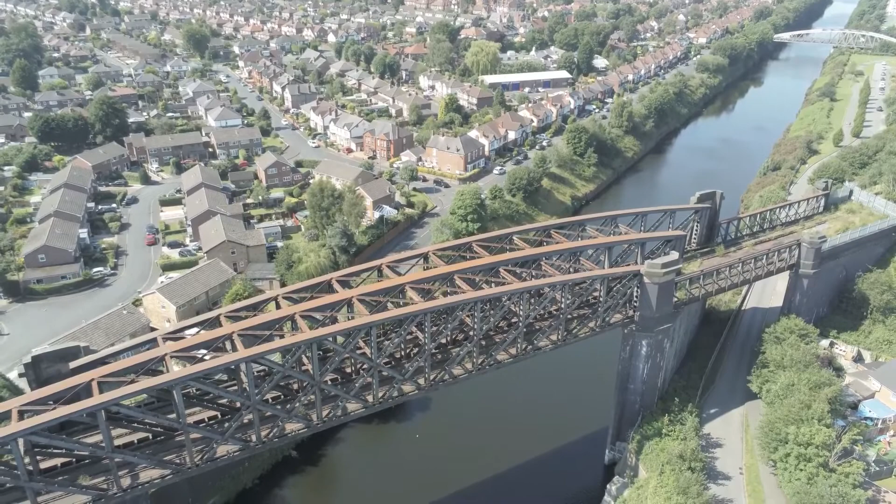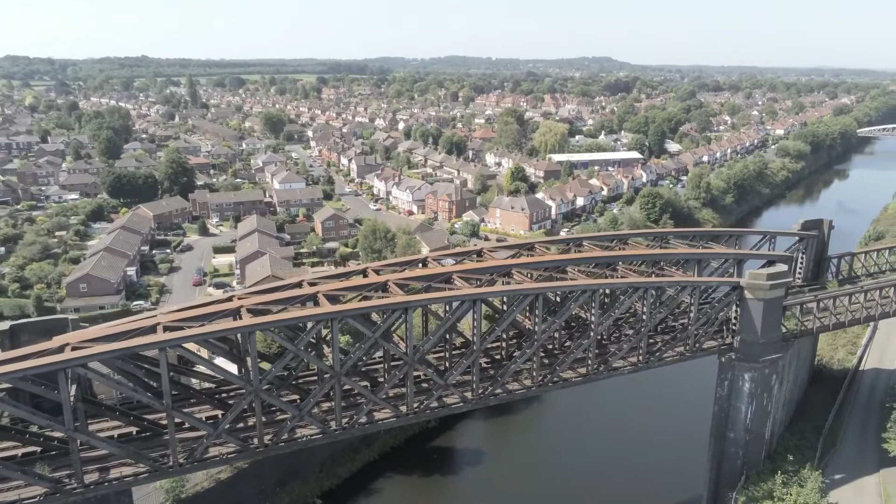Hello guys, welcome back. This is our second class of our course where we are designing a bridge, a prestressed bridge made of steel, concrete, and tendons that all compose the idea of prestressing.

In this class, I'm going to resume the first class where we saw how we are going to design our bridge, and we knew how the bridge was conceived. It's made of a 3-span bridge, 4 girders, a deck, a haunch, and a girder. The girder is made of a cross section of a BT-72 high. Our deck has a thickness ts of 8 inches. Our haunch is made of 1 inch thickness, and well, let's begin our class.

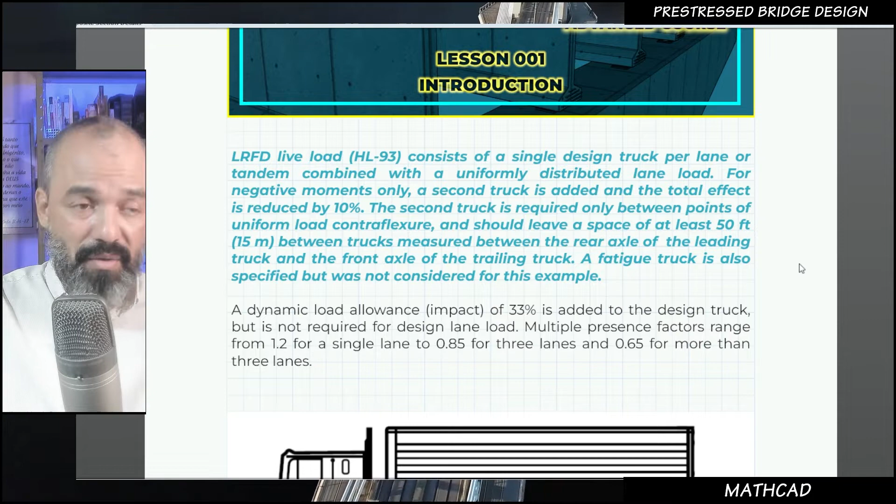So as I said, guys, you are going to take a PDF document where you can follow the instructions that I'm going to discuss in the classes. And we saw that we have to use a load truck in our designs, and this is very important in order to get the loads and the resistance that we are going to take out from the bridge. This idea of a dynamic load allowance impact of 33% we are going to discuss later in this class and in the course.

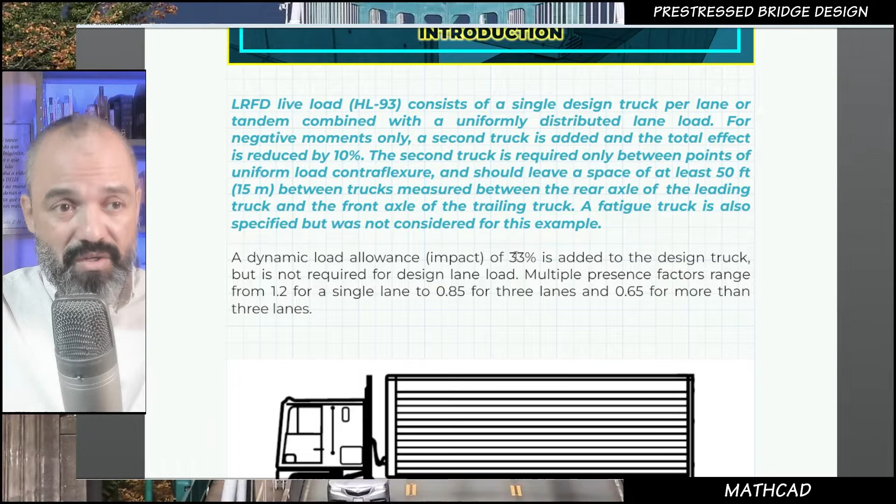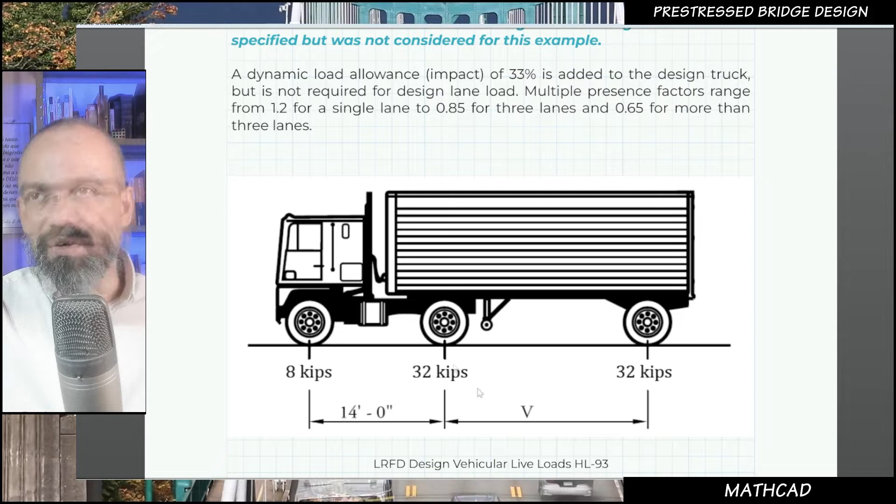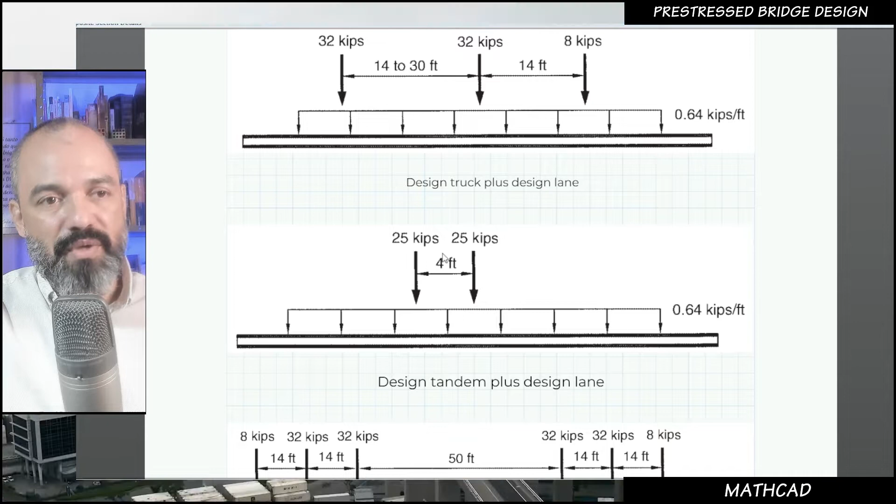This is our load truck, the design truck that we are going to use, made of 3 axles with 8 kips and 32 kips. We are going to use both distances here of 14. When we put the load of the truck on the bridge, this is the main idea of how we are going to use the loads, the lane load and the truck load, right? If we had chosen to use the tandem approach, these would be the loads that we had to use, but it's not the case here. This is the design we are going to see specifically in the 5th class.

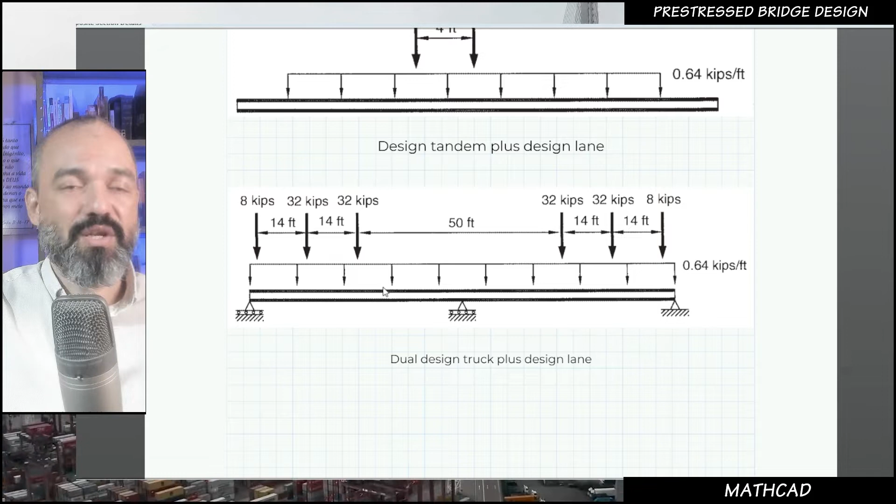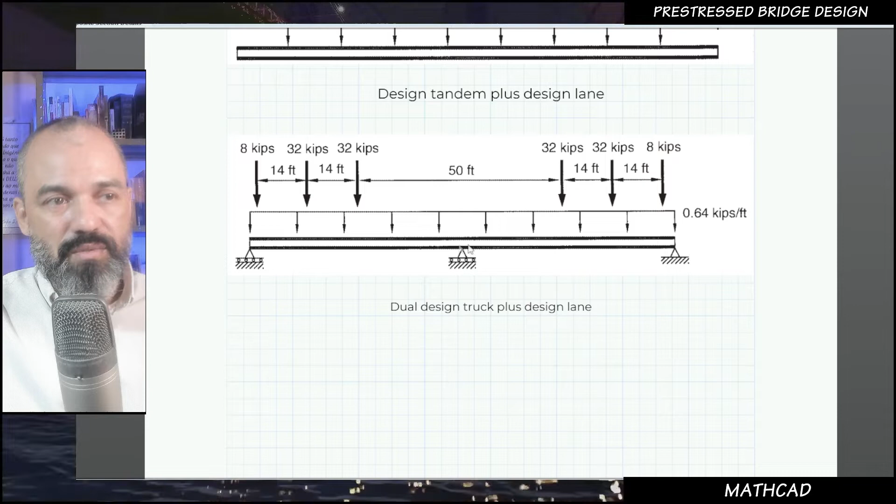We are going to discuss when we have a multi-span bridge, a continuous bridge, even though we are using a methodology made of girders that don't allow us to have a bending moment on the piers. What we have to do here is just to put a roller here, so we won't have negative moment on the piers, on the supports.

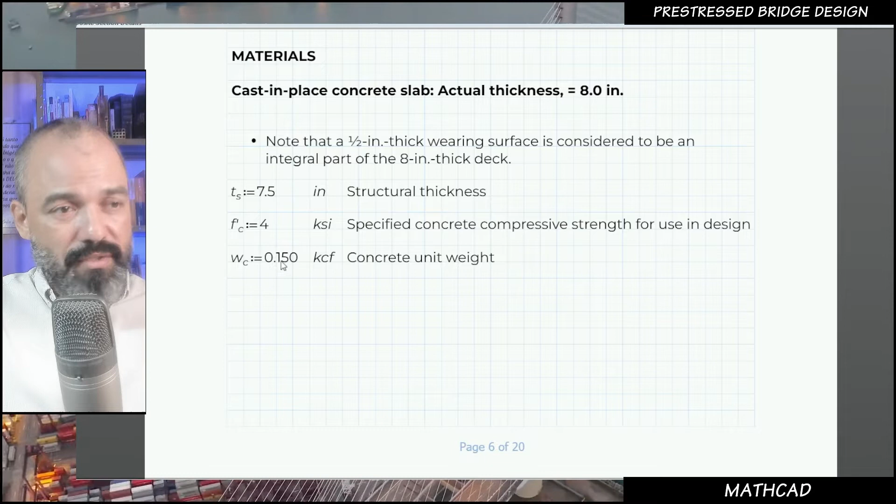This is our declaration of our variables, the ts of our deck. When designing the deck, we are going to use 7.5 inches, but when we are taking the self weight of the deck, we are going to use 8 inches. Our f'c is 4 ksi for the compressive strength of our concrete for the deck. Our concrete unit weight is 0.15 kcf. These are the declarations for our precast concrete beams.

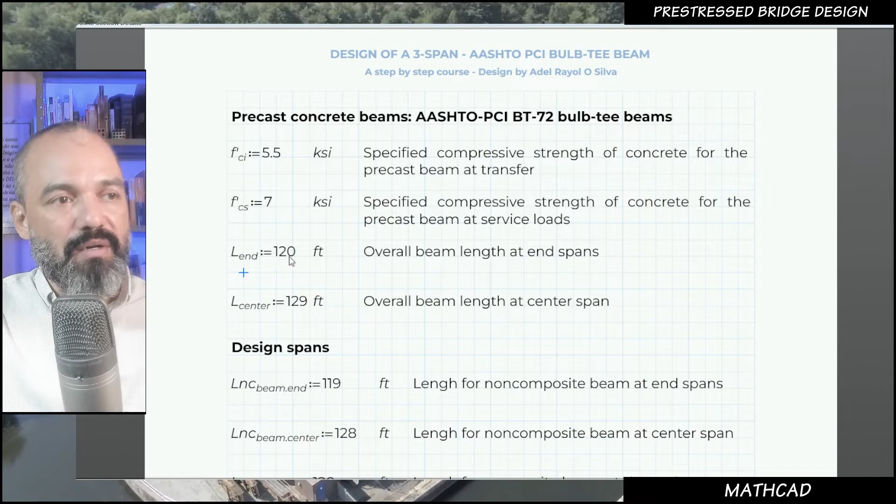It's made of an f'ci because it's initial, at the transfer, so that's why I call it i. We are going to use a different specified concrete strength for the deck and another for the girder, because we are thinking about economy when we are building the whole structure. And for our concrete at service loads, we are going to use our f'cs of 7 ksi. The length of our bridge is 120 here in our sketch of the bridge: 3 spans, span number 1, span number 2, span number 3.

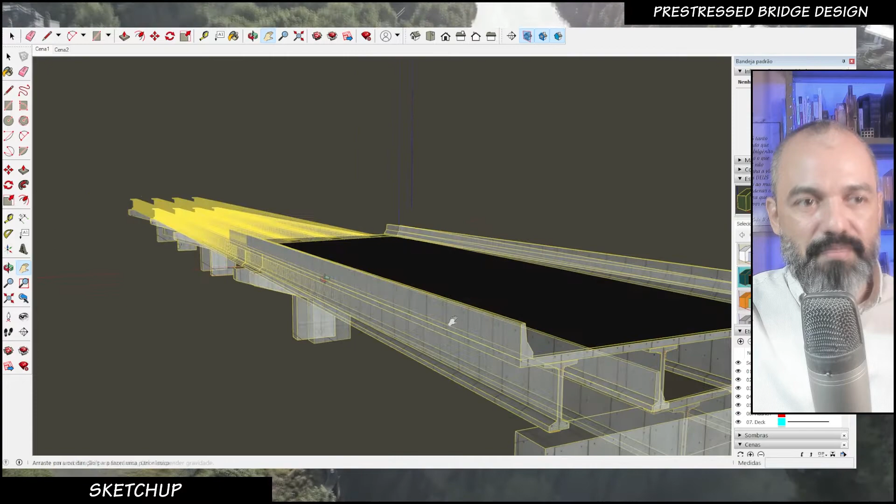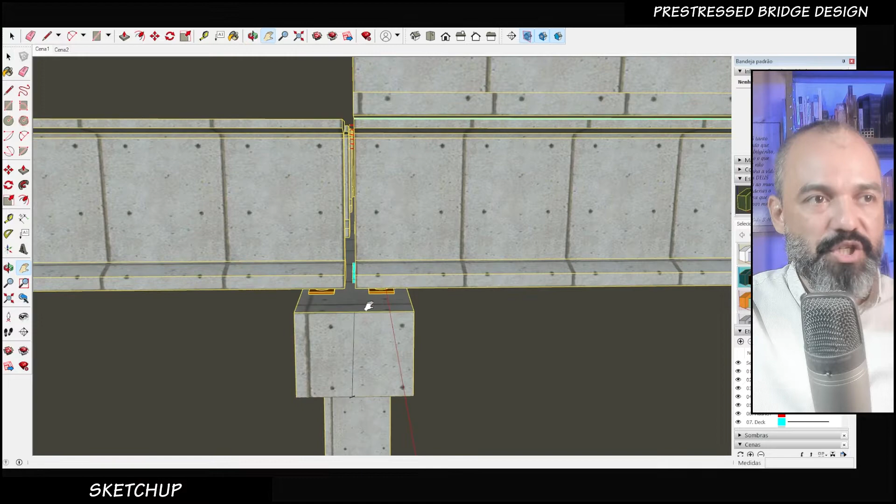I put here just a deck with a wearing surface and a barrier, in order to show you guys how the bridge is going to be at the end of the day, when we finish building it. So these are the tendons or the prestressing bars: harped tendons and the linear tendons down here, and the bearings. Thinking about a simply supported bridge, this is why we won't have negative moments here, because I have a separation between elements, right? So we won't have negative moments over the piers. So this is our bridge.

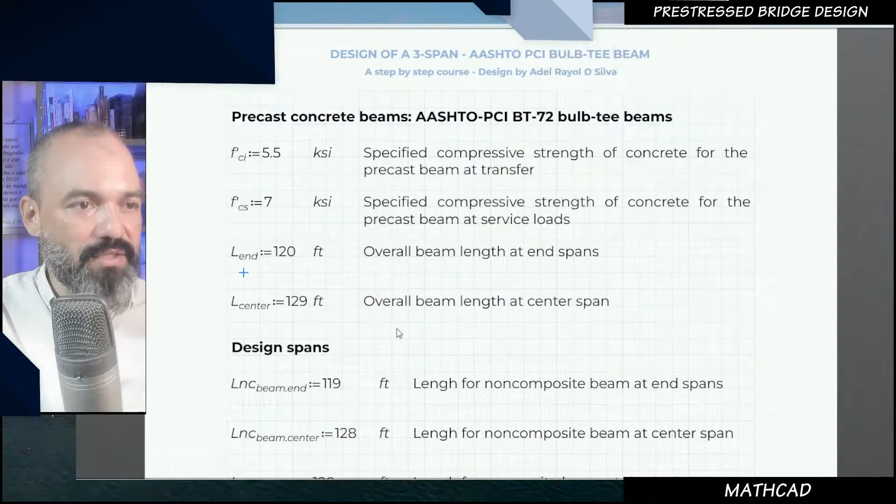So let's continue here. You can follow by the use of the PDF paper, or you can take this exercise into the MathCAD software.

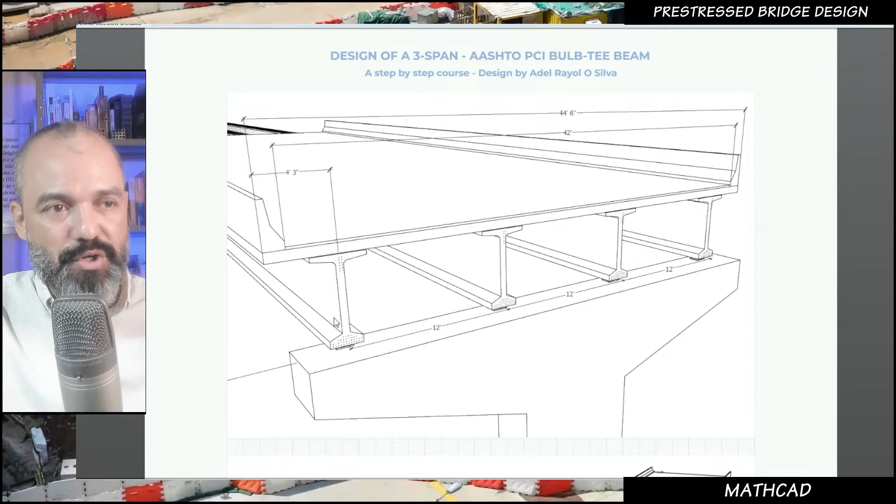So you are going to have the possibility of changing the variables, the numbers. So you are going to study any other bridge, span, number of girders, whatever. All right, you are free. Use this material as you will.

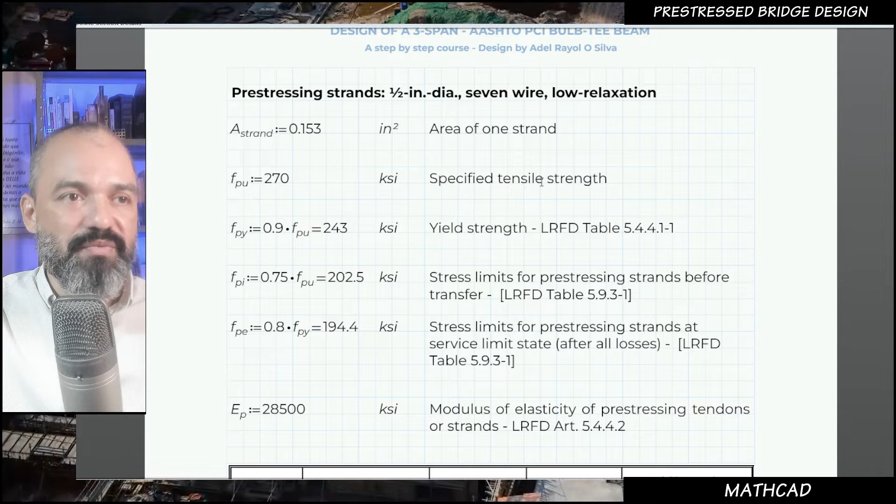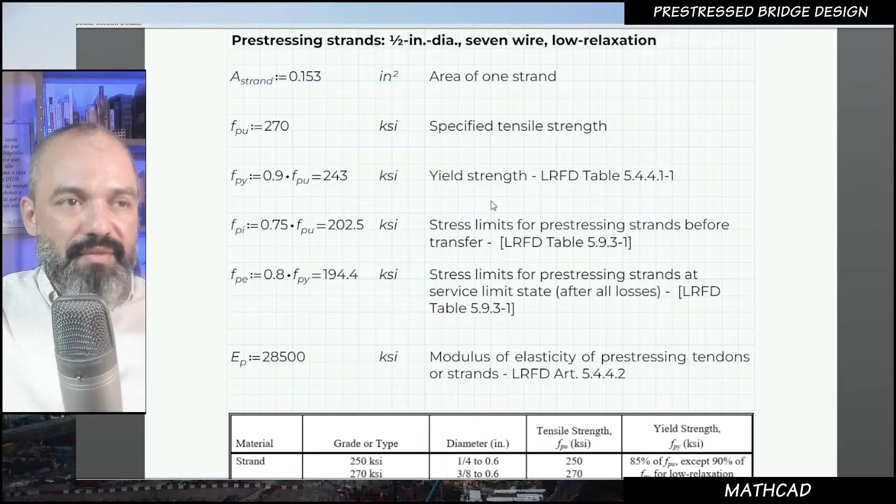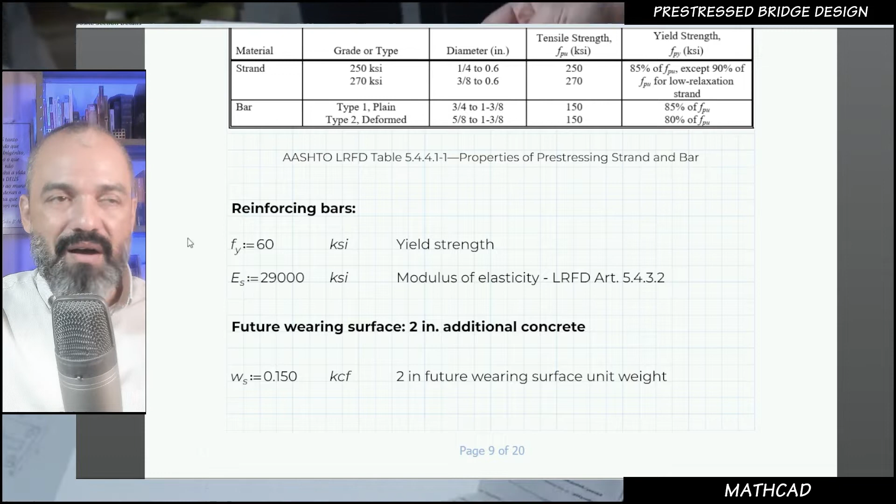This is a sketch of our spans, the area of a strand we declared in the first class. Our fpu, it's the specified tensile strength for our strands, right? Tension that we can use for the yield strength of the strands. You can see in the table down here the numbers that we are going to use, the modulus of elasticity of our reinforcing bars. We are going to use a future wearing surface of 2 inches thickness, all right.

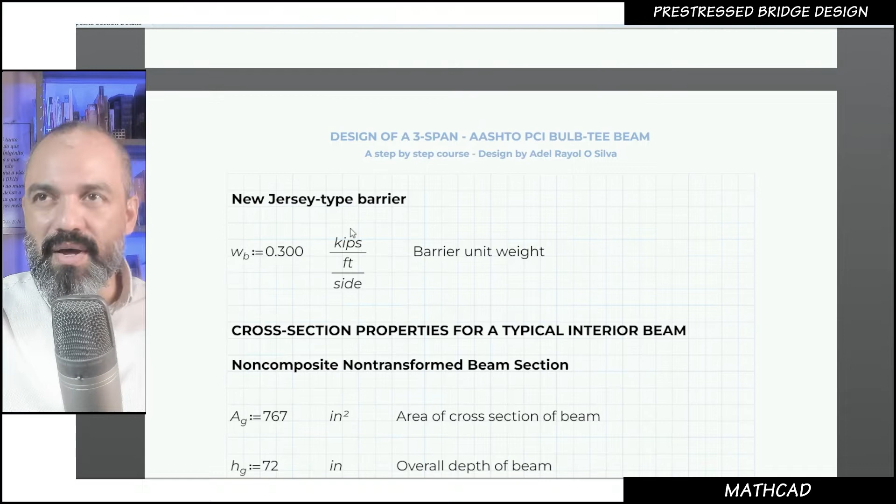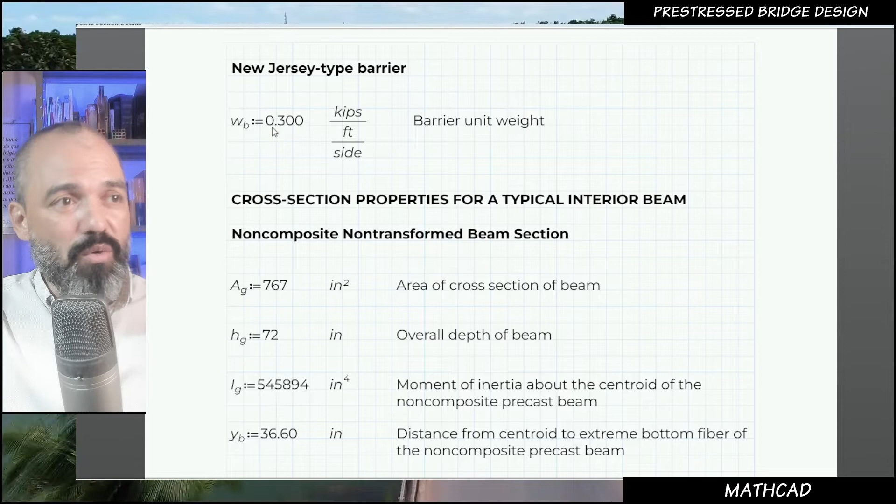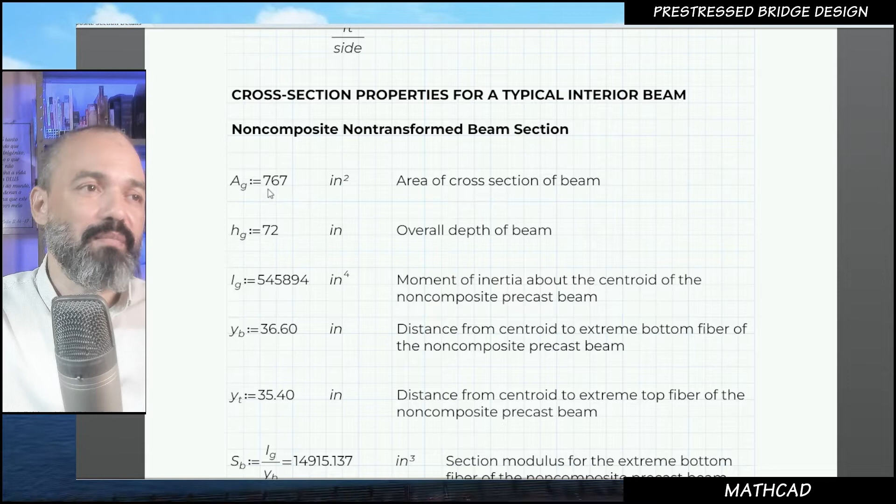Our barriers, or you call it New Jersey barrier, all right, with a self weight of 0.3 kips per foot per side. The area of the BT72, it's up here. You can take it from a table, also in the AASHTO tables, or consult the fabricators' tables. These guys that work with this kind of structure and design also have their own tables for area, for moment of inertia, for section modulus. So this is our declaration, because we are going to use it later on the course.

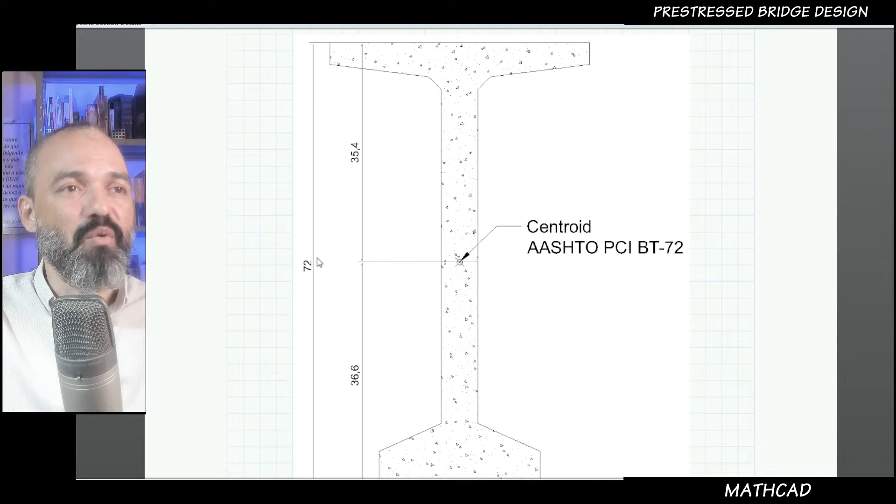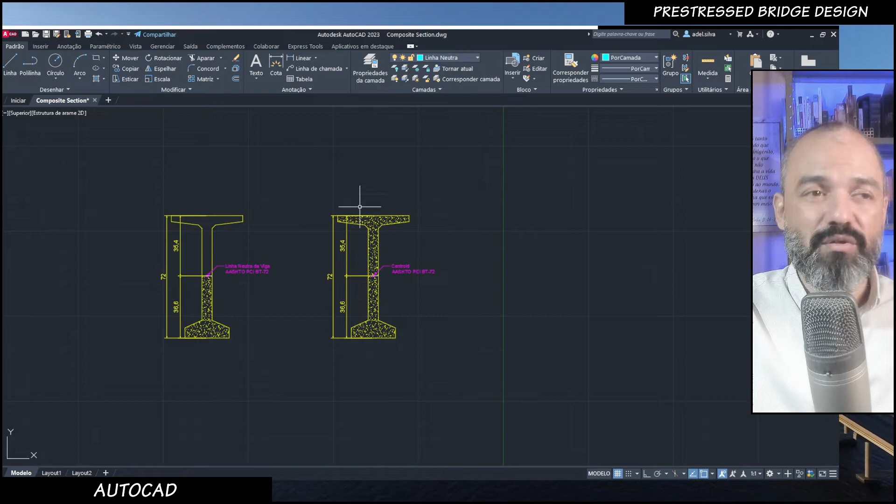This is a picture of our girder, the area, how it's made, right? So I used this information here, and I put it in AutoCAD. So here in AutoCAD, I could study the properties of the girder, the cross section, the area, the perimeter, and so on. So it's easy for us to define the centroid of a region, since you know how to use AutoCAD in order to take that information. All right, so I got some information about the girder, right?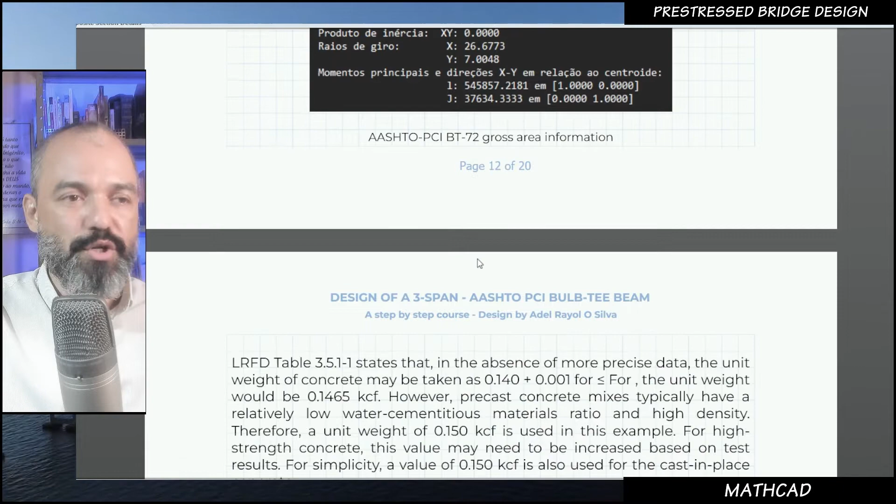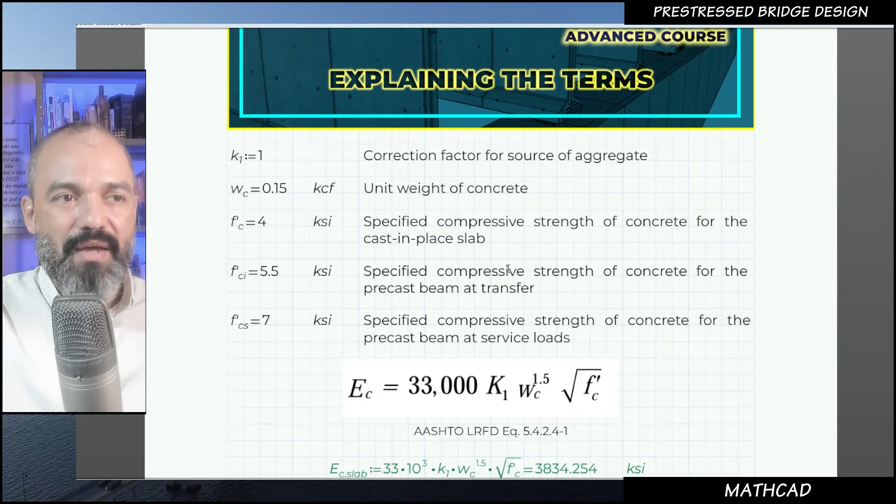This is a table that we are going to use for understanding the material weights used in the design, all right? I explained to you all the terms that we are using, how to find the modulus of elasticity for the concrete of the girder, the concrete of our deck, the concrete of our barriers.

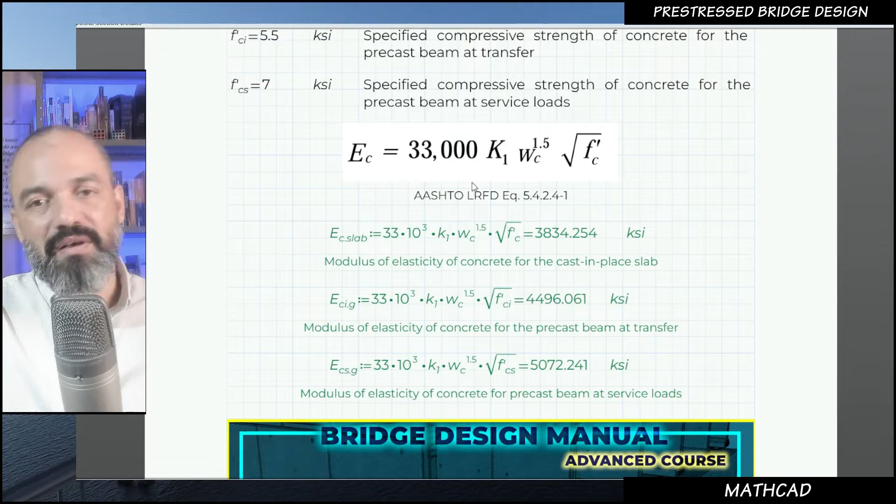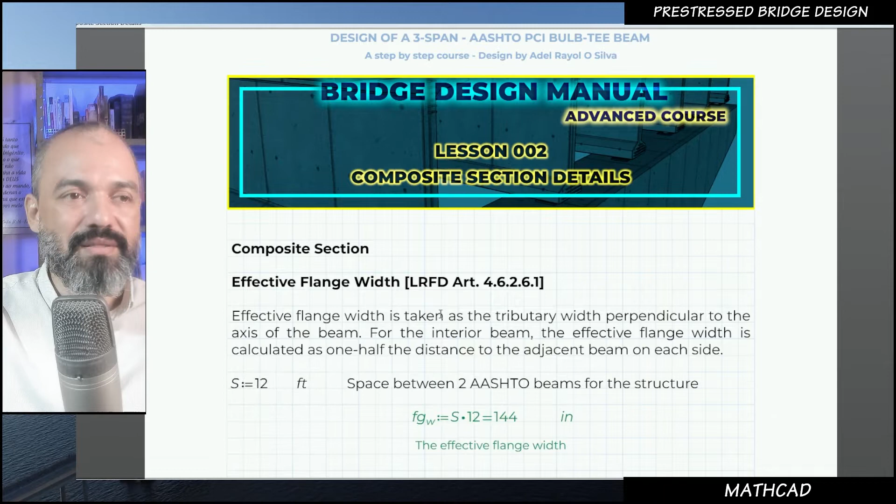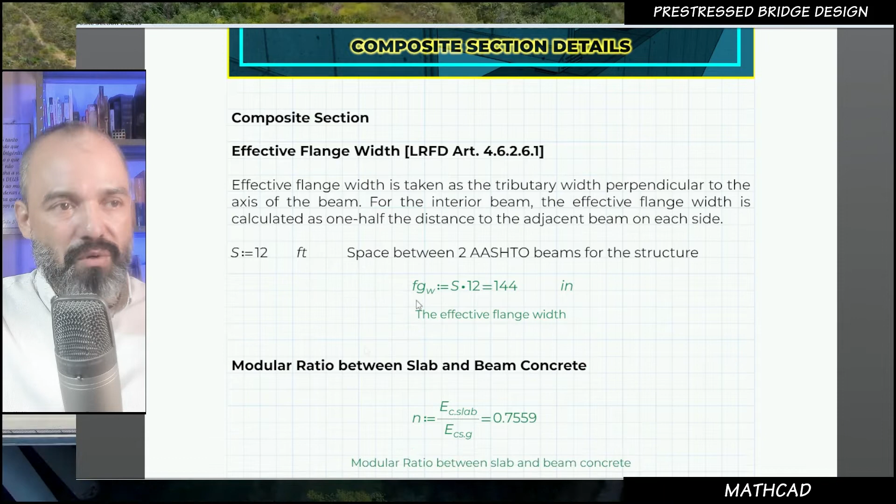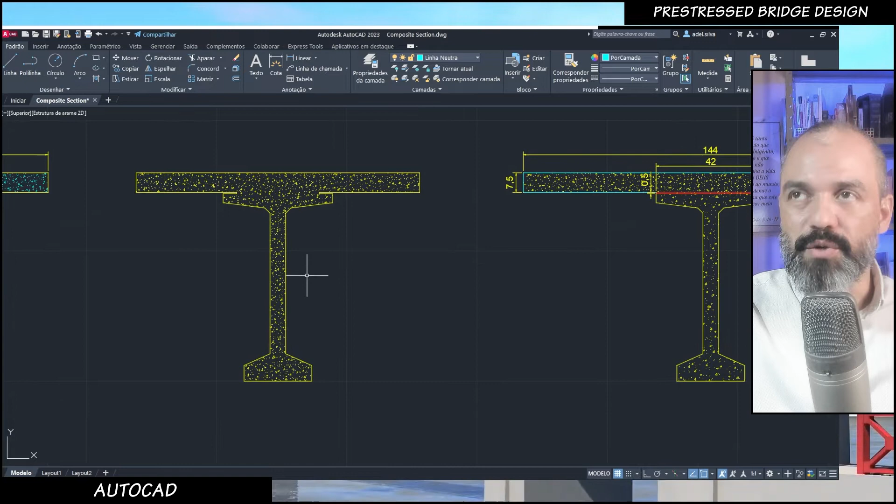And this is our lesson number 2, where we are going to study the section details of our girder, all right? We are going to use a spacing between girders of 12 feet, all right? So how can I find the effective flange? So what is a flange? The flange is the part of the deck, the slab here, that you use in order to understand how much of the loads of the truck is going to this girder and not to the other girder. This is an interior girder. So how much of the load it's going to carry, and this is the load that you are going to use for finding bending moments and shear stresses and whatever.

We have to find the modular ratio between the slab and the beam concrete since they are different. So we call it n. The modular ratio is taken when you divide the modulus of elasticity of the slab by the modulus of elasticity of our girder. So we got this number here, 0.7559. We are going to use it in order to see the performance, the behavior of our composite section.

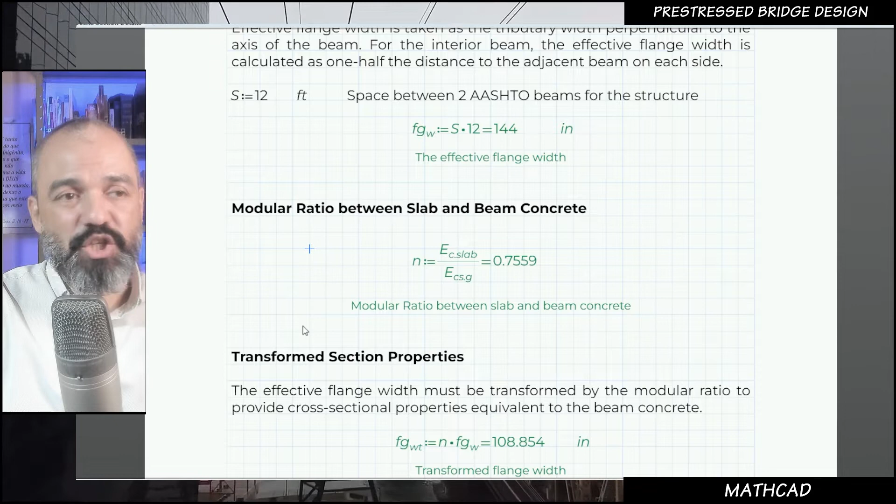All right. The transformed section properties: the effective flange width must be transformed by the modular ratio to provide cross-sectional properties equivalent to the beam concrete. So I am multiplying the flange that we found here by n, our modular ratio. So at the end of the day, I'm not taking the real area, but an area when you take different materials into just one section. All right, this is the main idea here.

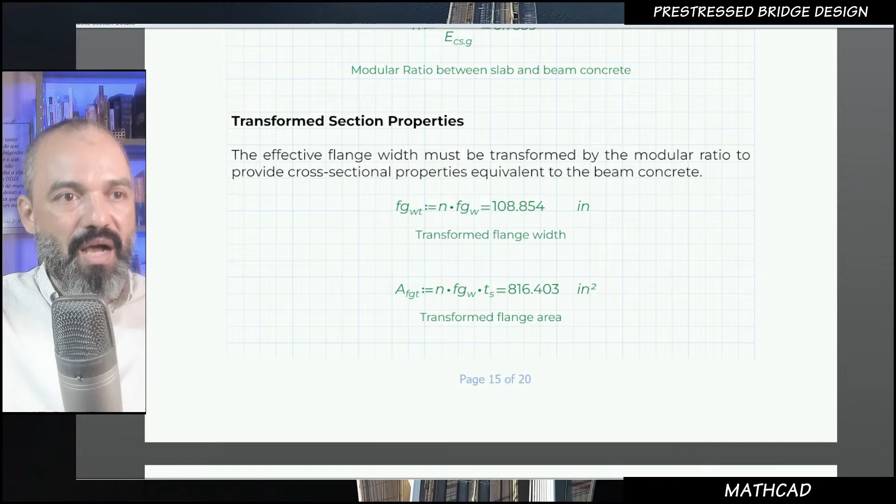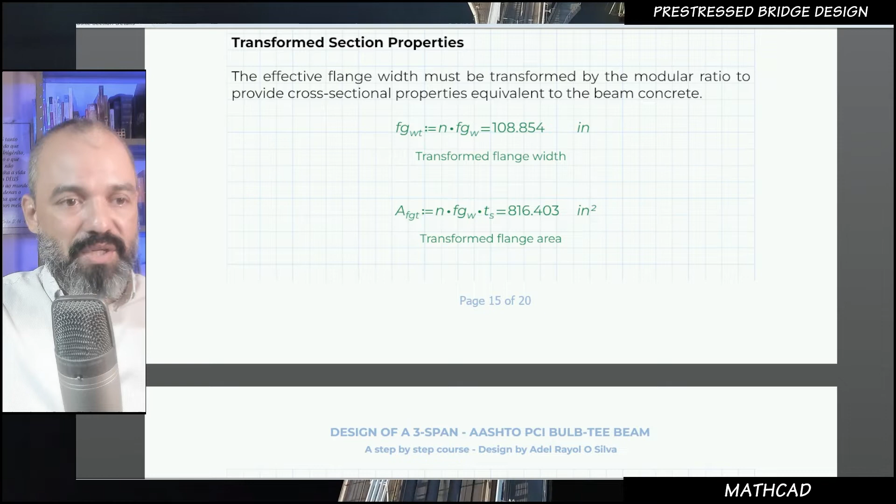So our transformed flange area is going to be the thickness of our deck multiplied by the flange width multiplied by n. So this is our area at the end of the day. All right, it's a different number from when you take only the area of the deck. Let me show you what I'm talking about here.

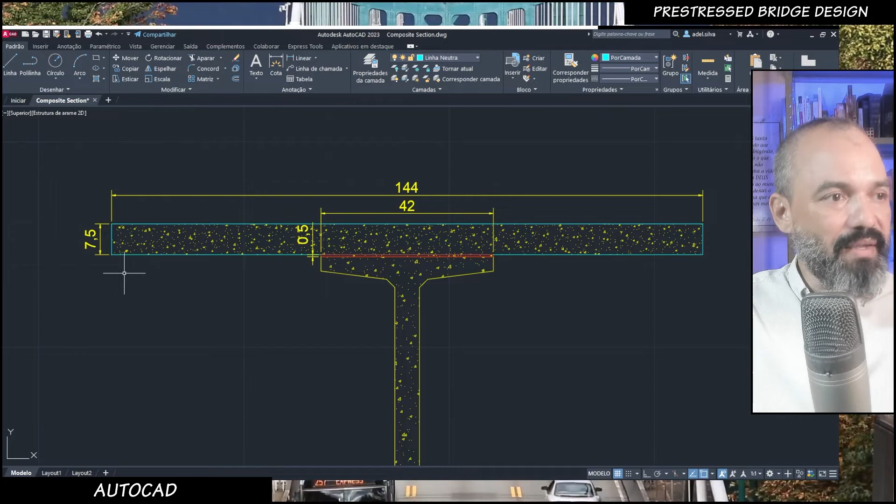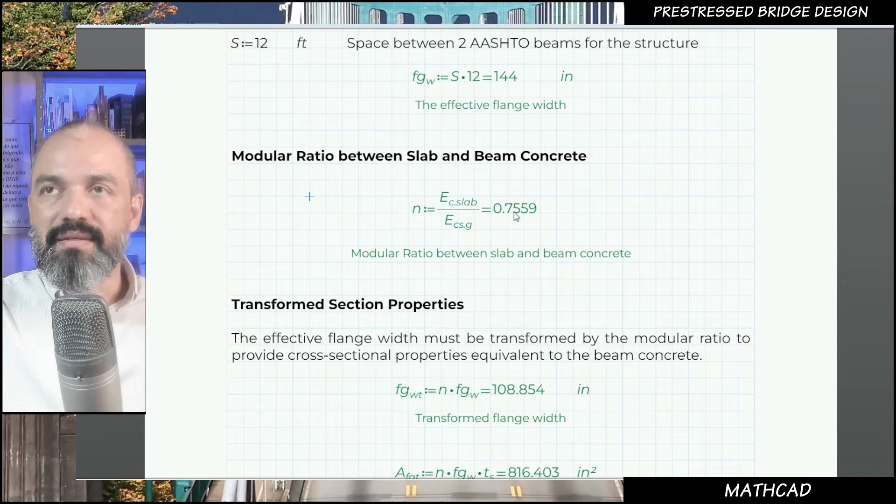If I take the area of this flange here, let's use the area command in AutoCAD. So I've got the real area of 1080 square inches, but when we multiply it here, I've got another area, because n is lower than 1, so I am going down with the area.

All right, so that's what happened here.

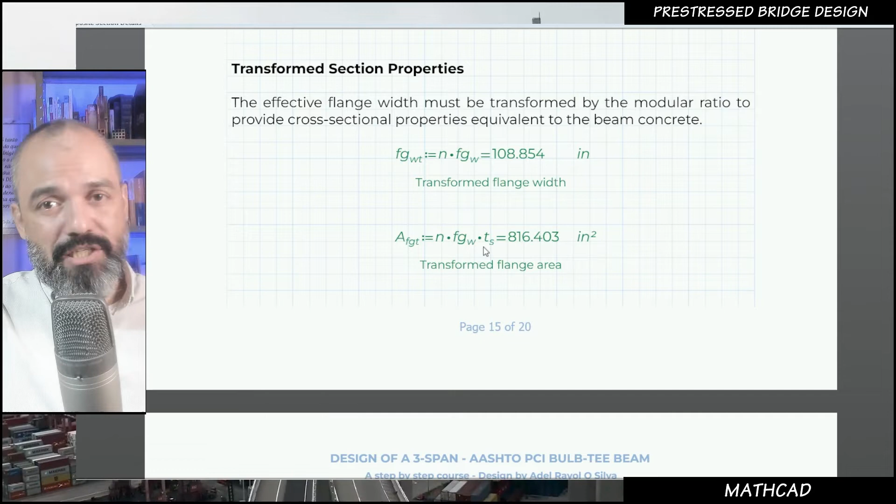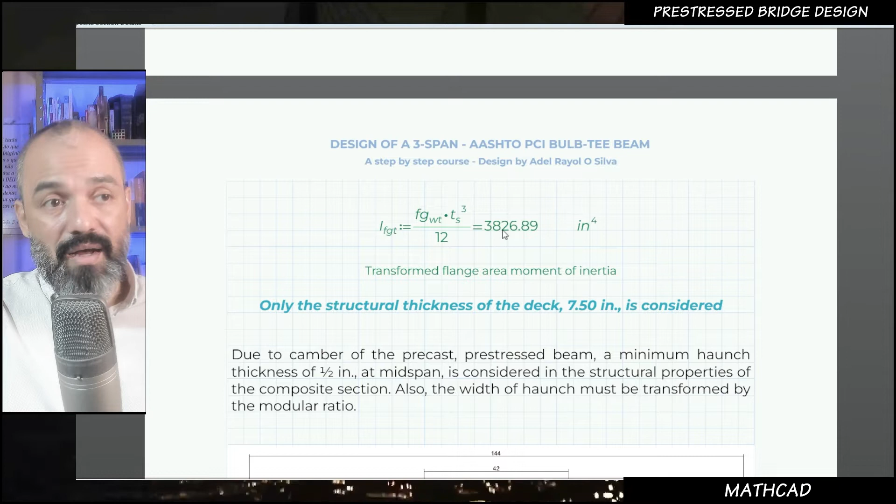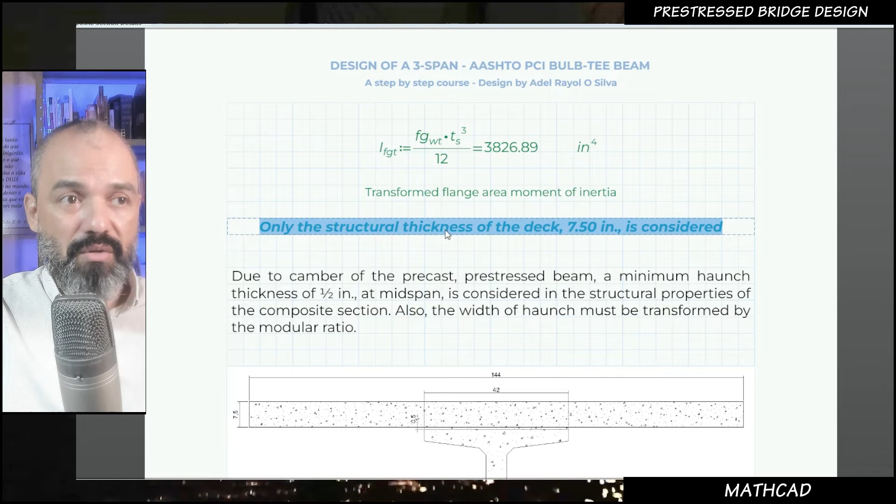So the transformed flange area moment of inertia is IFGT. It's just when you take the width of our deck flange times the thickness to the third divided by 12. I've got 3,826 inches to the fourth. I left highlighted here that only the structural thickness of the deck, 7.5 inches, is considered.

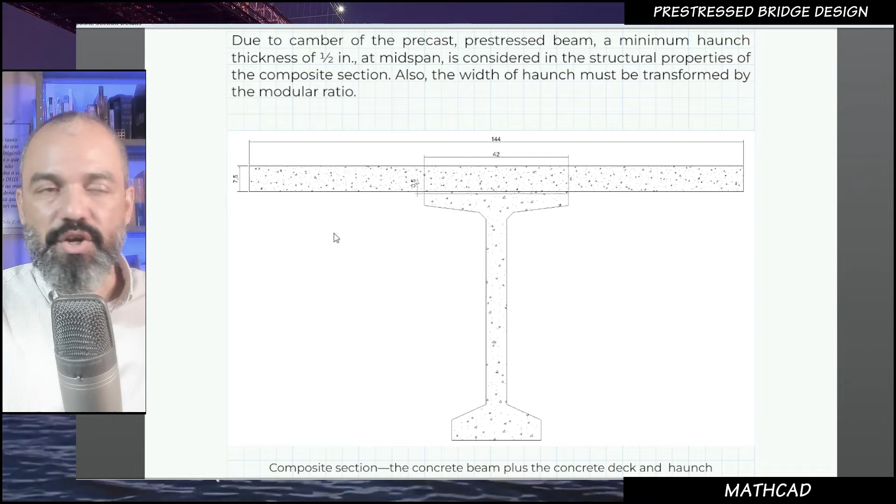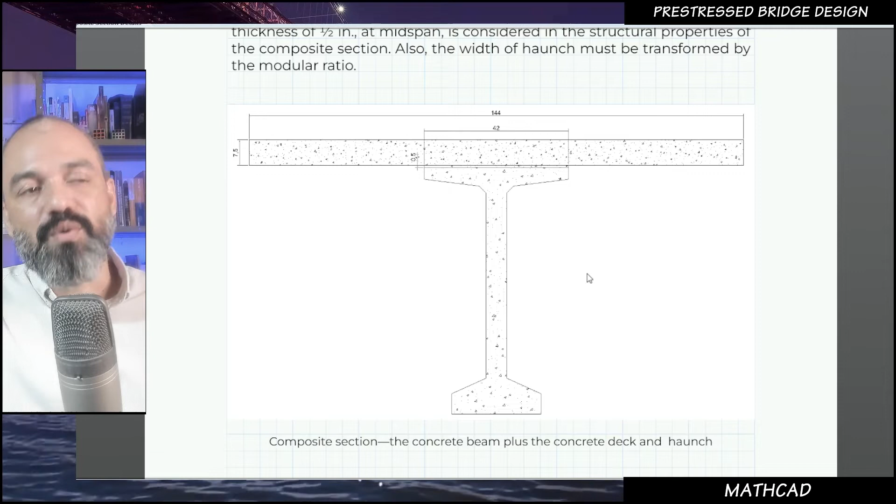All right. So at the end of the day, we are going to live with this cross section here. This is our composite section that we are going to use when we put the strands down and up here, and we're going to analyze it again later on in the course. So these are the dimensions that I've got at the end of the day.

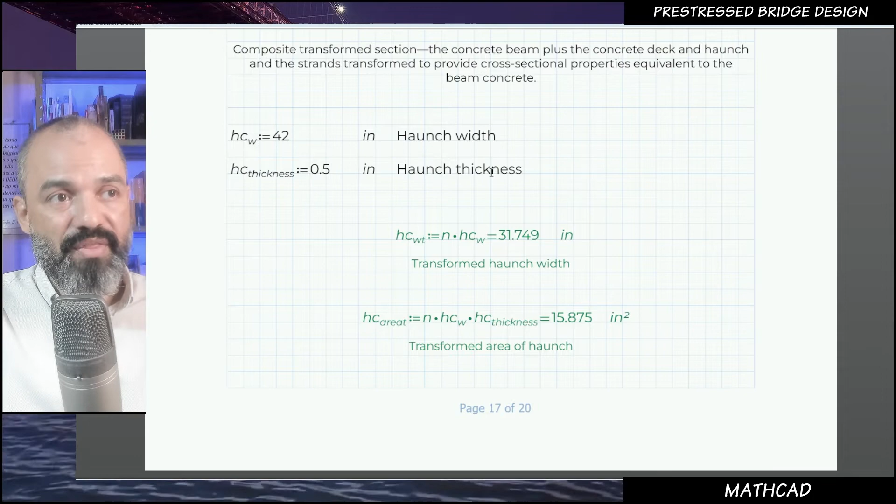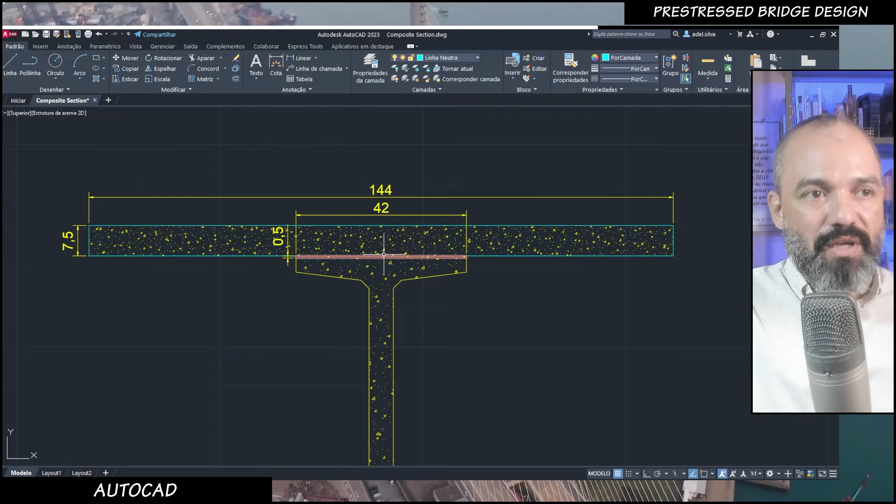So the HCW 42, it's the haunch width. The haunch is this guy here in red. We use it when we are planning to build a bridge that has a displacement for making the water from rain flow correctly. So sometimes you have to use this additional element on your bridge.

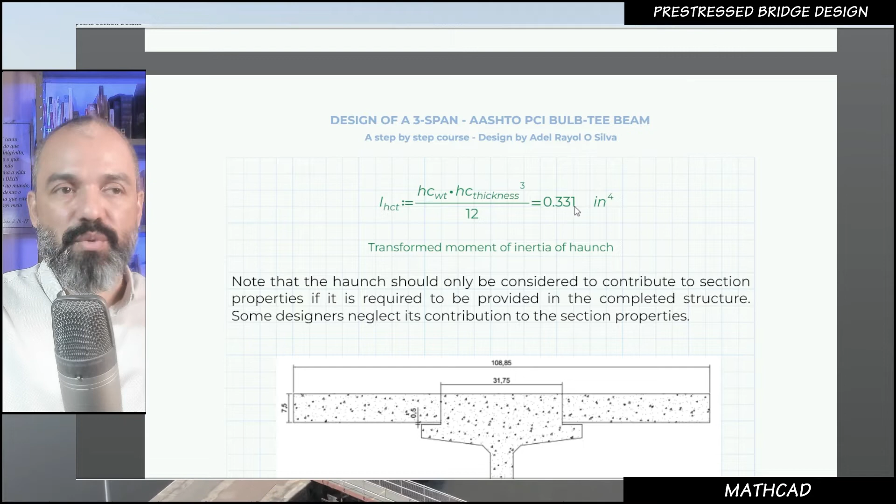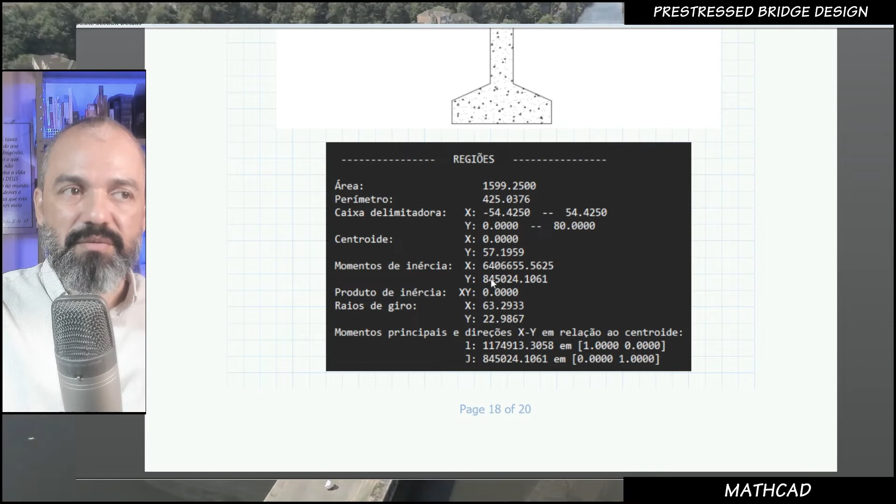All right, so this is the moment of inertia of our haunch: the haunch width multiplied by the haunch thickness to the third, divided by 12. So we've got here 0.331 inches to the fourth, right? This is a picture where you can find the information from our composite section. This is a table where we can sum it up.

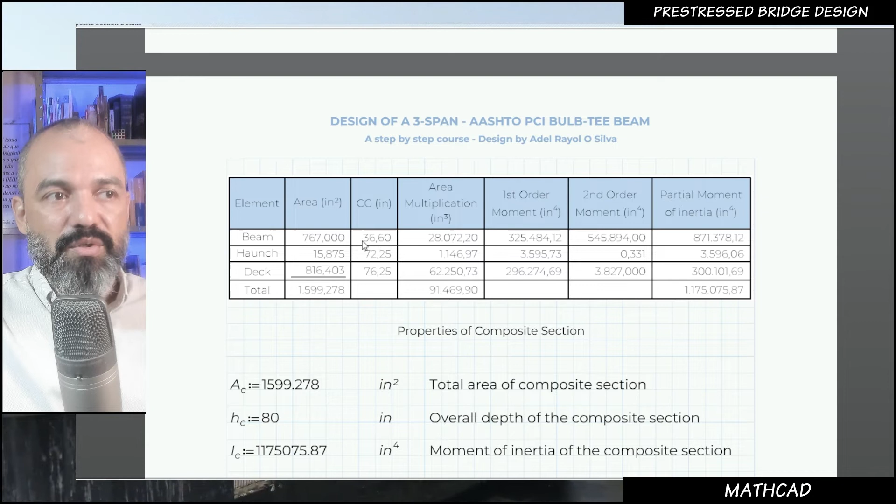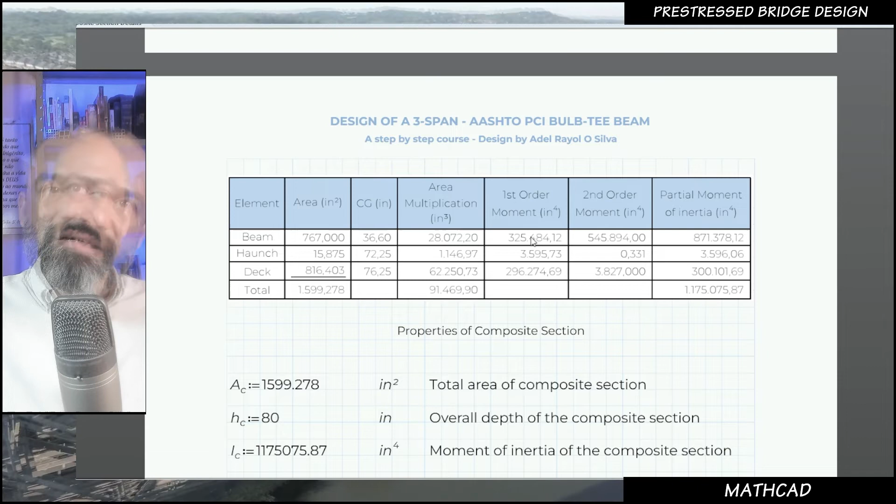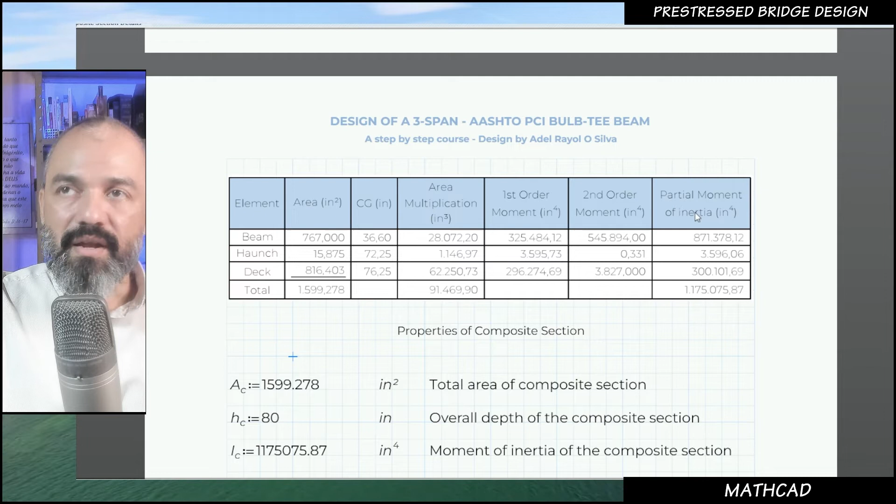So the beam area, the haunch area, the deck area. At the end of the day, we've got a composite section with area equal to the sum of the three elements. This is the centroid of the three elements. Multiplying the area by the centroid, you get this number, the first order moment. So when you study this section using the parallel axis theorem, the second order moment, at the end of the day we are going to have the moment of inertia of our composite section.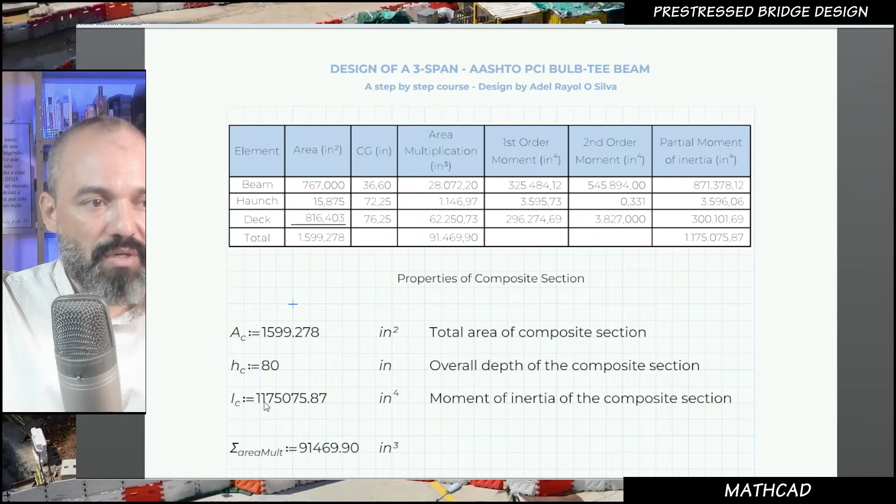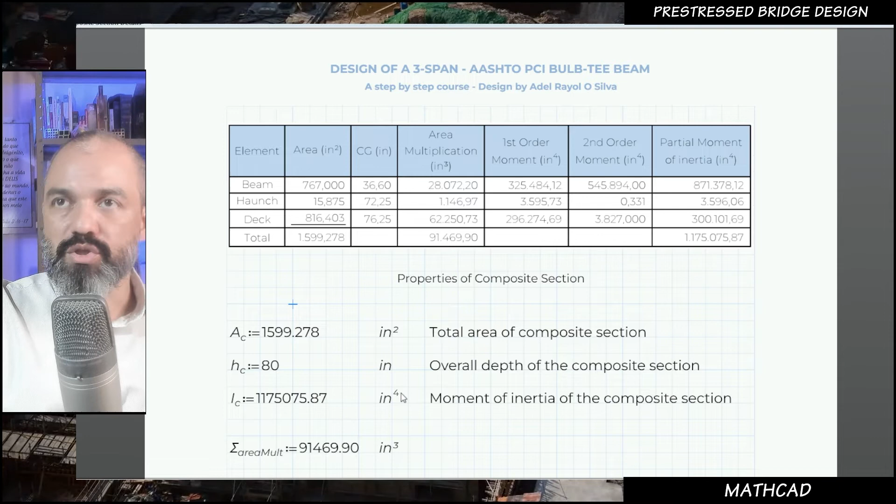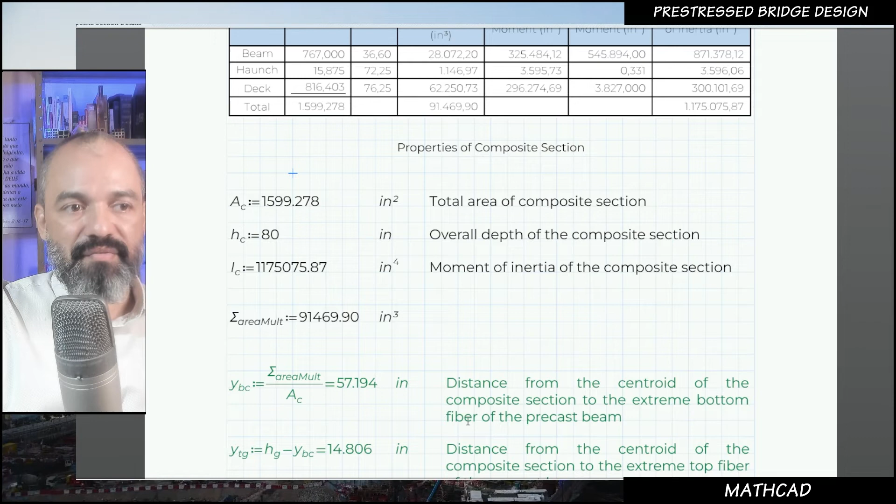All right, so this is the declaration. AC is the area of the composite section. It has a height of 80 inches and a moment of inertia of 1,175,075.87 inches to the fourth. If I divide the sum of the area multiplication here by the area of our section, I find the distance from the centroid of the composite section to the extreme bottom fiber of the precast beam. You can also find it using AutoCAD, so it's not a problem. I'm just showing you that you can find it by this equation, or simply in the AutoCAD software.

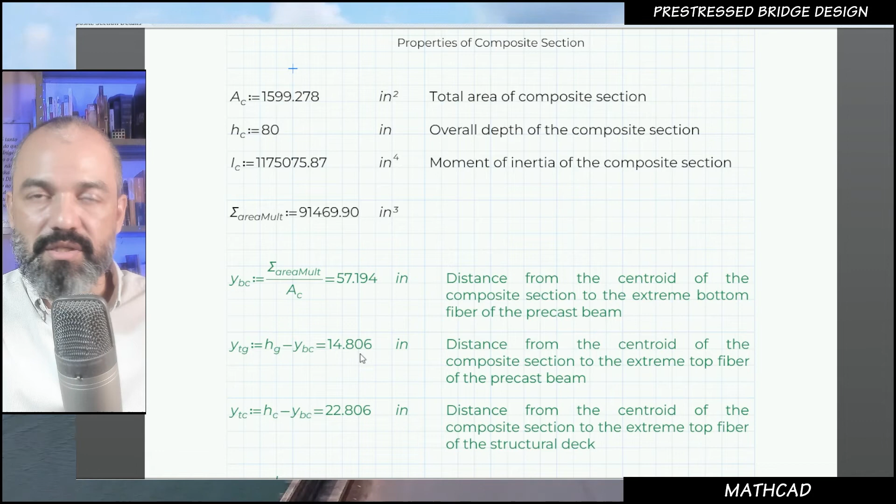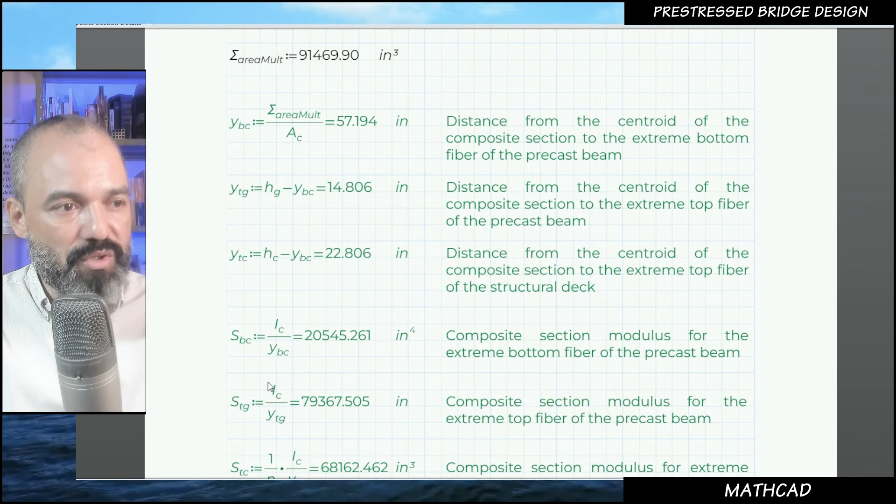The distance from the centroid of the composite section to the extreme top fiber is the height of our girder minus the centroid of the composite section. This is the distance between those centroids. So here I'm finding the centroids and the section modulus when we take the composite section, not only the girder. From now on we are using the composite section to find the section modulus from bottom and from top. You can see it here.

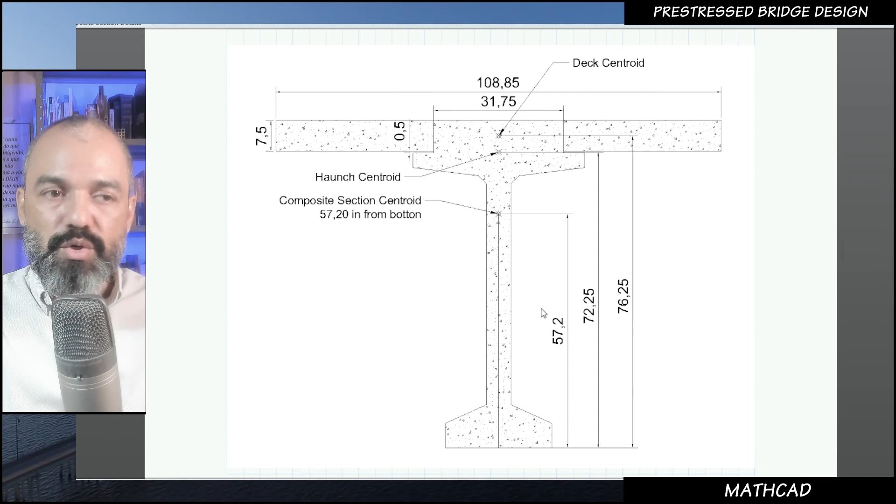So this is a final sketch of our composite section: the centroid of the haunch, the centroid of the deck, the centroid of the girder a little down here below. At the end of the day, the centroid of the composite section, which is most important here, is 57.2 inches from the bottom of the girder.